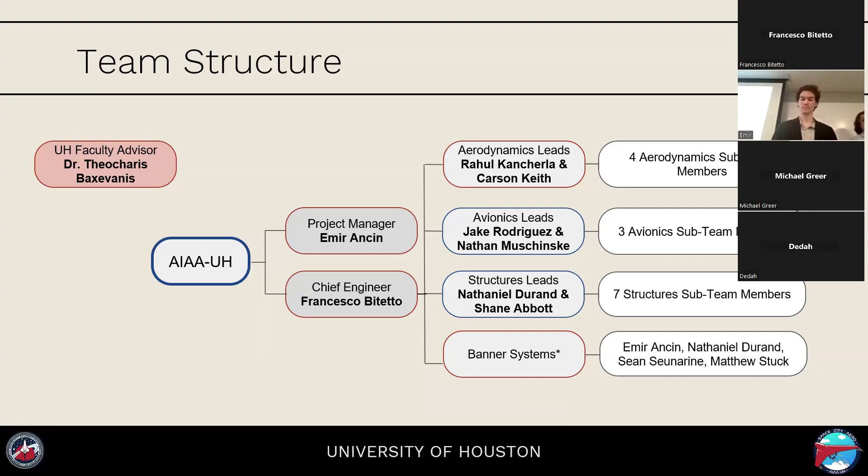All right, now let's talk a bit about the Design Build Fly competition. It's an RC aircraft competition hosted by AIAA. The challenge changes each year, and includes 3 flight missions and 1 ground mission.

At the end of last year, around September, we had to submit a proposal, and the top 100 proposals worldwide get invited to the fly-off. This year's fly-off will be in Wichita, Kansas, on April 16th to 19th.

This year's competition has a theme of a banner towing bush plane, where we have to design, build, and fly a banner towing bush plane that can also do shorter missions and deploy a banner.

We have some major constraints, like a max wingspan of 5 feet with a minimum wingspan of 3 feet. We can only have a battery with a capacity of 100 watt-hours maximum. Due to FAA regulations, we cannot have a plane with a max takeoff weight over 55 pounds. And each mission has a flight window of 5 minutes.

The first mission is simple: we just have to complete 3 laps flying the flight path with no cargo, no banner, just regular standard flight configuration, and we have to do it under 5 minutes. After a successful landing, we get a score of 1.

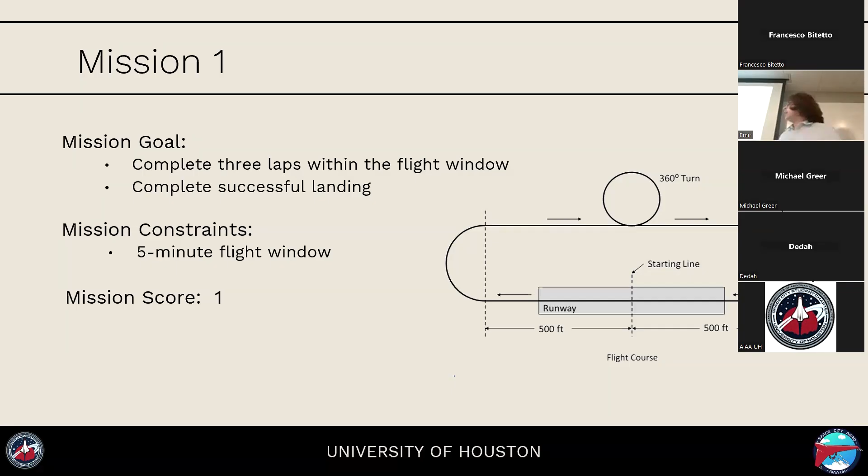Our second mission starts the shorter section of the competition, where we have to complete as many laps as possible under the 5-minute constraint, carrying as many ducks and pucks as we can. There are some constraints though: we must have a minimum of 3 passengers, minimum of 1 cargo, and our minimum cargo to passenger ratio is 1-to-3.

We also must load all the cargo and passengers in a staging box under 5 minutes before flight happens. Our mission score is based on 1 plus net income over the maximum net income someone has earned in the overall competition. The net income is based on the number of ducks and laps, minus the cost, which is also based on the number of ducks, pucks, and laps, but also multiplied by the total propulsion battery capacity.

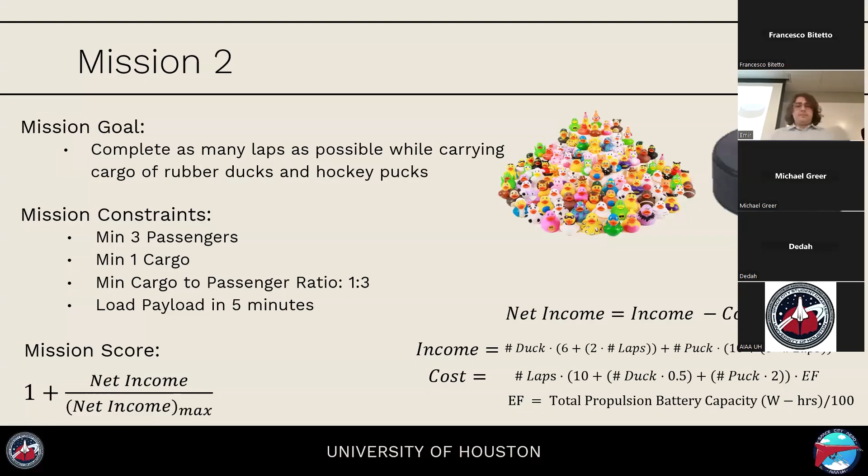Our third mission is the banner deployment, where after initial takeoff, we must deploy the banner after the first turn, do as many laps as possible under the 5-minute flight window, and then before landing, we must deploy the banner again and have a successful landing.

Some of the constraints are we have a minimum banner length of 10 inches with a minimum banner height of 2 inches. The length to height ratio is 5:1. And during flight, the banner must stay stable and vertical.

For the scoring, it's 2 plus the laps we do times the banner length, divided by the RAC score. The RAC score is based on our wingspan, so it's 0.05 times the wingspan plus 0.75. This gives us a constraint of trying to reduce the wingspan as much as possible. Then it's all divided by the maximum score someone got.

Our last mission is the ground mission, where we must complete a set of tasks as fast as possible. The scoring is all based on time. We must load and unload all cargo and passengers, install the banner, deploy the banner, and verify that all control systems are working. This will all happen in a box of 10 by 10 feet.

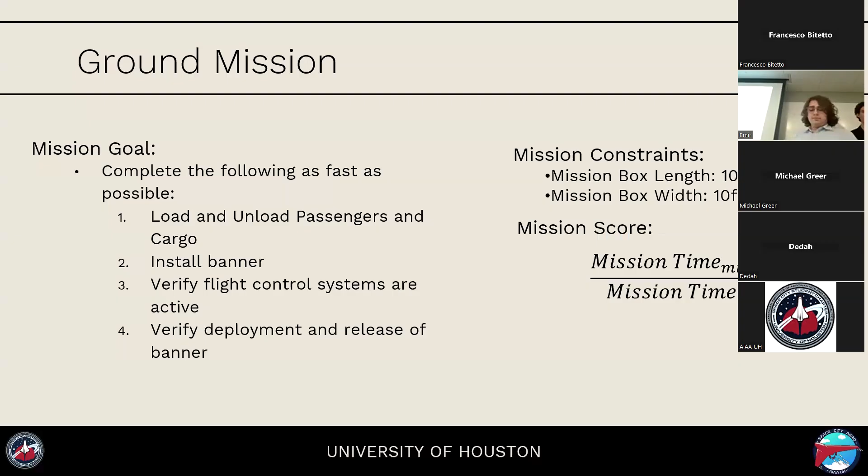When it came to our design methodology, we had a linear engineering-based path where we started with the conceptual design, looking at all constraints. We analyzed all the mission requirements, then moved over to a preliminary design, figuring out the sizing we needed. We did some performance analysis and certain trade studies on all different components.

We then moved over to having a detailed design, finalized a lot of details, then started manufacturing, and afterwards moved over to testing. We evaluate all the testing and how the design performed, and depending on how the test comes out, we would either go back to the drawing board and fix the issues that come up, or finalize those designs for the final competition aircraft.

Here's our design approach for each specific mission. For the first mission, we had a constraint of needing proper maneuverability to fly the course. The aircraft had to fly at a certain velocity to ensure we complete 3 laps under the 5-minute window, and we also needed to make sure the plane was easy to manufacture.

For our second mission, we wanted to maximize the amount of cargo space for the ducks and the pucks. We needed to maximize the amount of laps we could complete, and make sure our wing was capable of producing enough lift to take off with all of that cargo. We also had to make sure the cargo and passengers could be loaded under the 5-minute window.

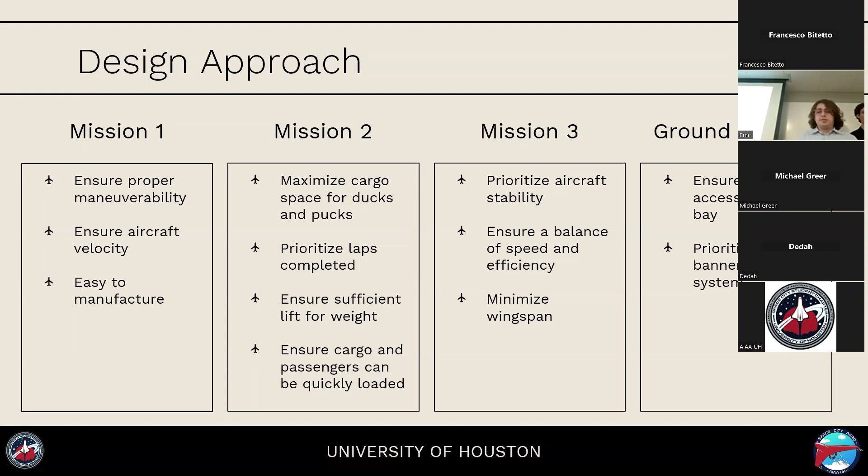Now, before we could even fly, we do have to pass tech inspection. Tech inspection involves verifying the safety of the design, ensuring that everything is good and flight ready. We must have a signed pre-tech and first flight certification form, and we must show a video of straight and level flight.

None of our batteries can exceed 100 watt-hours. If we have multiple banners for mission 3, they must all be brought to tech inspection and signed off. We must also verify that we have a fail-safe mode, which is having the throttle closed, full up elevator, full right rudder, full right aileron, and full flaps down.

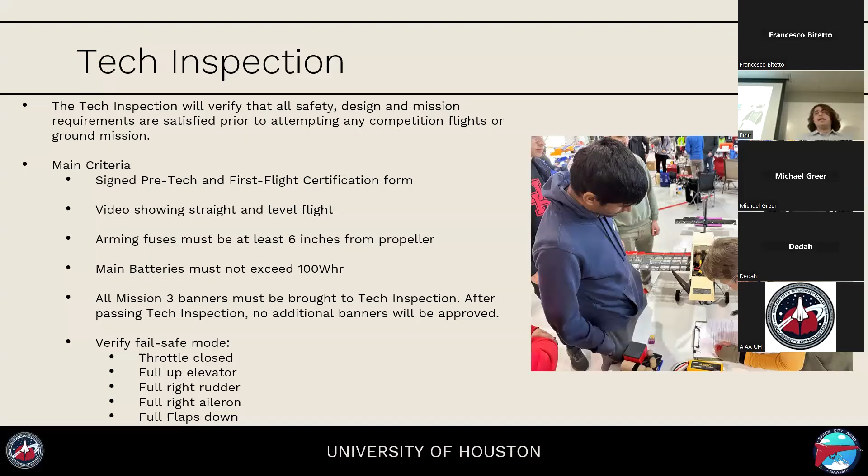I would like to now talk about the team goals we set for ourselves at the beginning of this year. We had 3 major goals. Those were attending the competition fly-off.

This comes from our proposal scoring being in the top 100 proposals overall. Second, manufacturing a flying prototype by CDR. Third, actually attending competition and attempting all 3 flight missions and 1 ground mission.

Looking at those goals right now, we have successfully achieved the first goal, which is attending the competition fly-off. Our proposal scored 17th out of 175 teams globally, and also scored the best in Texas, which is the best score in team history.

Looking at the second goal, design and manufacture a flying prototype by CDR, as you can see, our prototype plane is here. In terms of a flying prototype, it is currently missing minor things, MonoKote being one of them, and the battery and ESC, like avionics installation on the aircraft. But besides that, the plane is there.

And we are hoping to achieve our last goal in April at the competition.

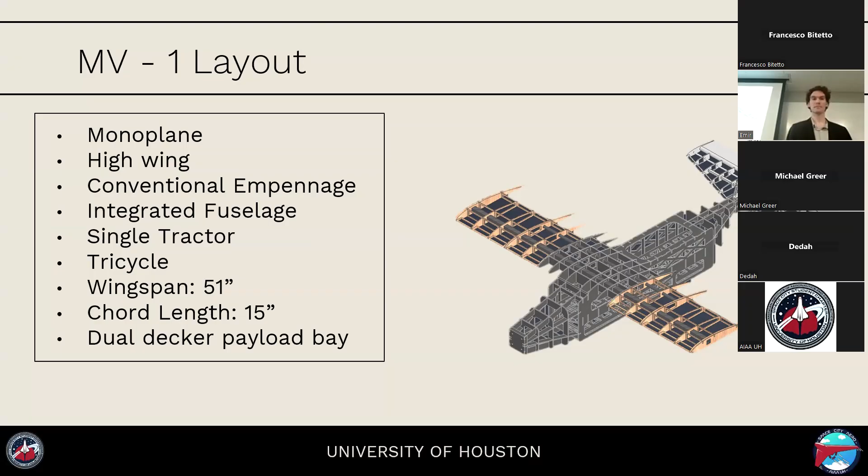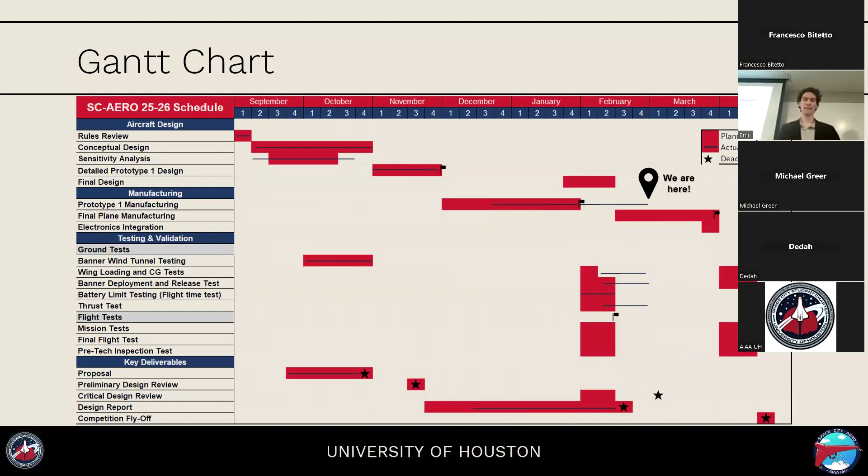However, I would like to mention here that we are indeed about 3 weeks behind the Gantt chart that we proposed because of a few issues. The main one being no access to manufacturing lab space. We were expecting to start building the plane over winter break, given our lab space at TechBridge, but unfortunately that did not happen. Our backup plan was UH Makerspace in the Bates Law building, and we had to wait about 2 weeks for that to open when the semester started. So we have that kind of setback in our Gantt chart.

Looking at our remaining weeks and going forward schedule: week 1, starting next week, we are hoping to implement feedback from CDR and start designing the MV-0 prototype aircraft. MV-1 will be the final competition aircraft. In week 2, we hope to start test flights of the MV-0 prototype and begin early manufacturing of the final aircraft, MV-1, starting with laser cutting.

In weeks 3 and 4, we are hoping to manufacture the final competition aircraft, which includes assembly of the parts, gluing the parts, electronics assembly, and 3D printing the necessary components. The 4th week will also include the final MonoKote wrapping of the aircraft, and the 5th week will be the final flight tests. The subsequent week, we are hoping to attend the competition April 16th through 19th in Wichita, Kansas.

Looking at the team budget, this year the project is sponsored by the Fluor Fund, which funding will be used for the electronics, structural, and manufacturing cost of this aircraft, as well as manufacturing tools for future years. Avionics and structures are covered by Fluor funding.

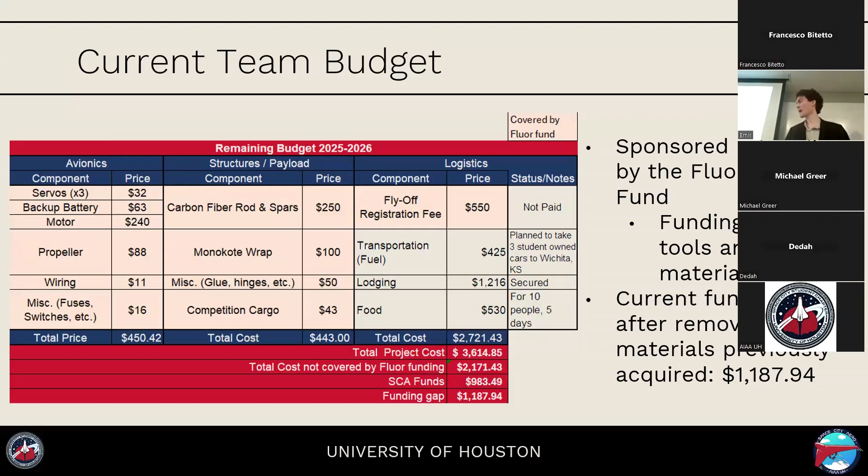With that being said, I will give it to Aerodynamics for their updates.

So what do we do in Aerodynamics? We design, manufacture, and analyze the wings, empennage, and their associated control surfaces, as well as any other aerodynamic related components of the aircraft. There are really 2 components to what we do: the analytical components and the structural components. The analytical being airfoil, wing and tail configuration, lift analysis, and stability analysis. Then we move on to the more structural components, which is the actual design of the wings, empennage, and control surfaces. Software we use includes XFLR5, COMSOL, MATLAB, and CAD software.

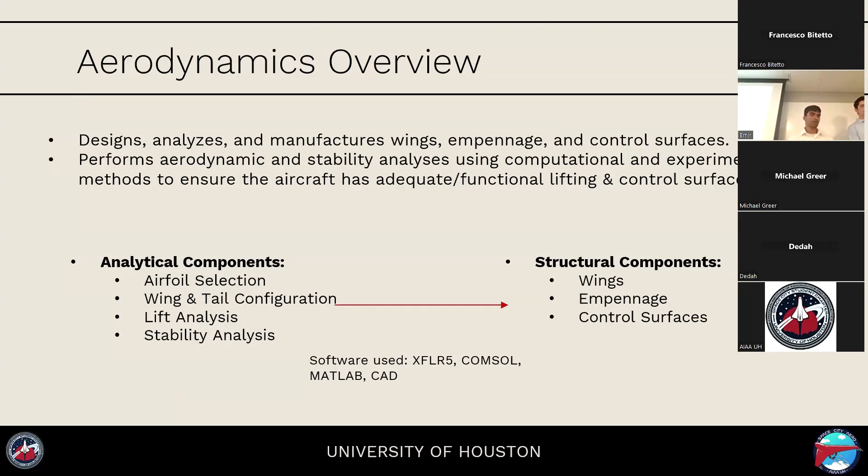So from basically going from PDR to our first prototype, that's basically conceptual design to physical prototype. What got updated was the empennage sizing itself. We took into account volume coefficients this time. In the past, we would just use rules of thumb that we had in the back of our heads. Now we take into consideration the wingspan, the surface area of the wing, as well as moment arms.

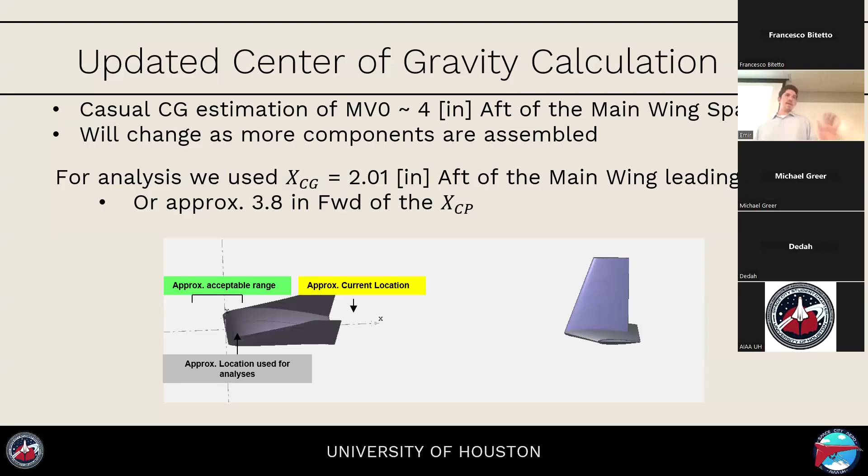When I came in here in the spring, I wasn't obviously here for the main theory stuff in the fall, but for the spring, I wanted to join the team. We wanted to research a little bit, specifically the winglet and also the idea of adding fairing to the landing gear. Obviously, neither are critical for the safety of flight, but definitely looked into for purposes of efficiency.

So I did the winglet trade study here. As you can see, there's 4 different ones we compared: the traditional, blended, the end plate, and the Hoerner tip. We also compared it with no winglet just to make sure, just to compare the differences that we were getting. So the traditional winglet actually ended up winning.

Before, we had kind of a holistic decision matrix, which included things like integrity and manufacturability as criteria, but really we didn't have a value for those. So we took those out because manufacturing is pretty similar for all of them and not as much of a concern. So we ended up just using the coefficient of lift, coefficient of drag ratios, the lift force and the drag force, which of course traditional won in 2 out of the 3 of those. So that's what we're going to do for winglets for MV-1. For MV-0, we don't plan on testing the winglets.

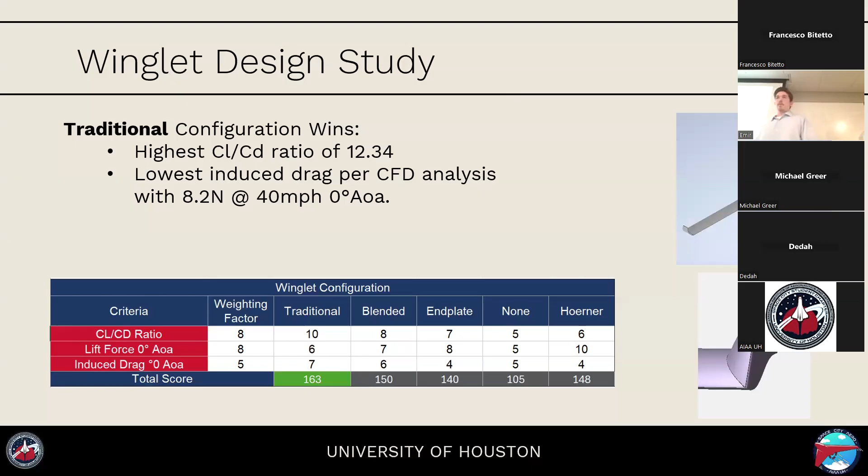Landing gear fairing design. This was actually done by one of our members. I just did the CFD on it and got the drag force.

As you can see, the wheel alone has about 0.593 newtons, and with the fairing it reduces to 0.578. So a little bit of a reduction, and that's on our 4.3 inch diameter wheel. There's going to be 3 on the airplane, so just a little bit of a gain, and again, another research item that we did.

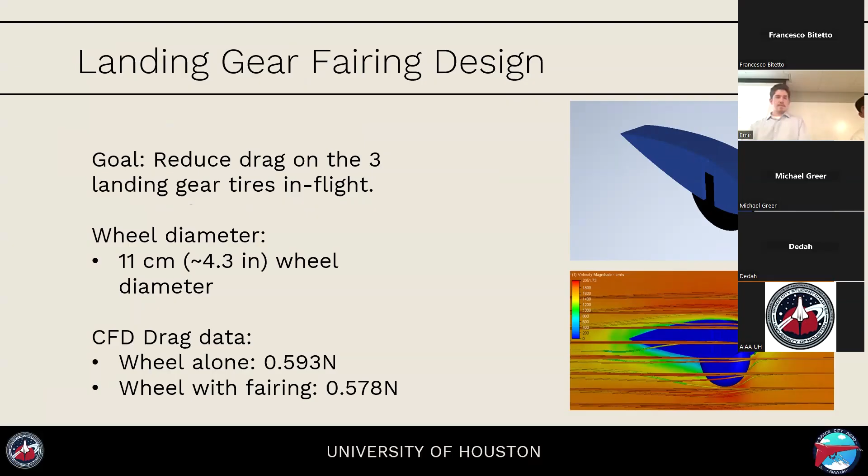So the final design parameters of the wings and the empennage for MV-0 include the following. The wing will have an airfoil of SD7032. It's a high wing configuration. The span is 51 inches and chord being 15. The taper ratio is constant forward with no sweep.

The horizontal and vertical will both have an airfoil of NACA 0012, the span being 27 for horizontal and 11 for vertical, with a taper ratio of 0.57 and 0.55 respectively, also with no sweep.

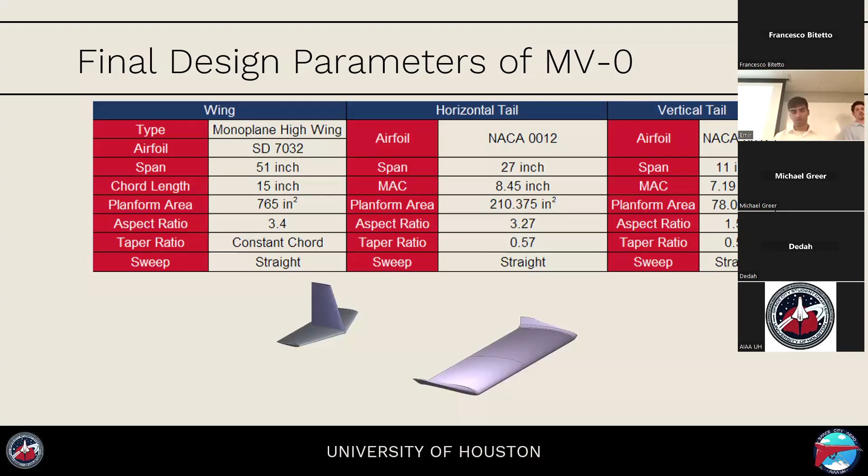Next, moving on to the aerodynamics MV-0 testing, which is basically the center of gravity test. The objective is to verify the actual CG compared to the analysis data. The methodology would be a balance point test using a carbon fiber spar, and the expected outcome is that the ideal CG is forward of the wings.

Concluding for aerodynamics, we're going to talk about the lessons learned and the things we plan to change for MV-1. Starting off, we actually made the control surface, the empennage, the horizontal stabilizer in the tail, much bigger compared to before, because that was actually one of the main factors of the mishap crash at DBF 2024. That was one of the main causes, so we are confident in our sizing for this year.

As far as for MV-0, we're using again that SD7032 airfoil. One of its weaknesses is that it has some sacrificed lift generation compared to, for example, NACA 5412, which is what we used last year and the year before. The reason we used it was for efficiency optimization, so we are sacrificing some lift.

Because of that, we are going to have to fly at a higher cruise speed than, for example, with the 5412, since we have less lift, and that could be a problem. Again, we talk about landing and takeoff speeds with the landing gear. That's where the high takeoff and landing speeds could be a problem.

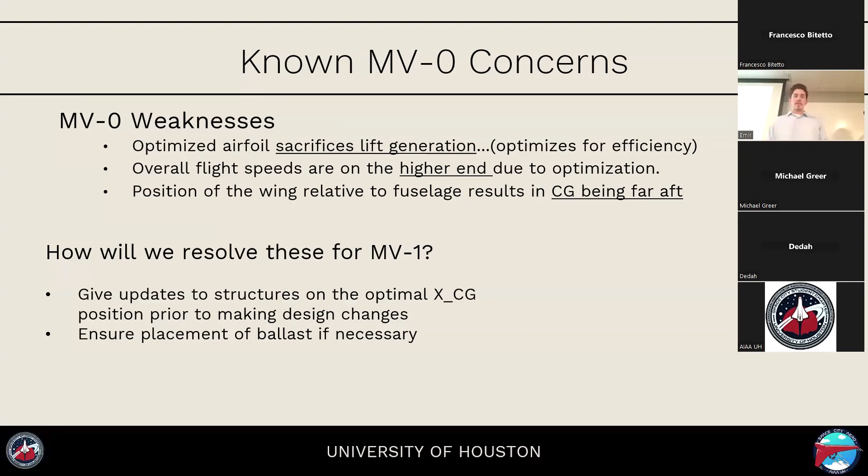And yep, that is it for aerodynamics.

Good evening, everyone. I am Shane, one of the structures sub-team co-leads. I am Nathaniel, the other sub-team co-lead for structures.

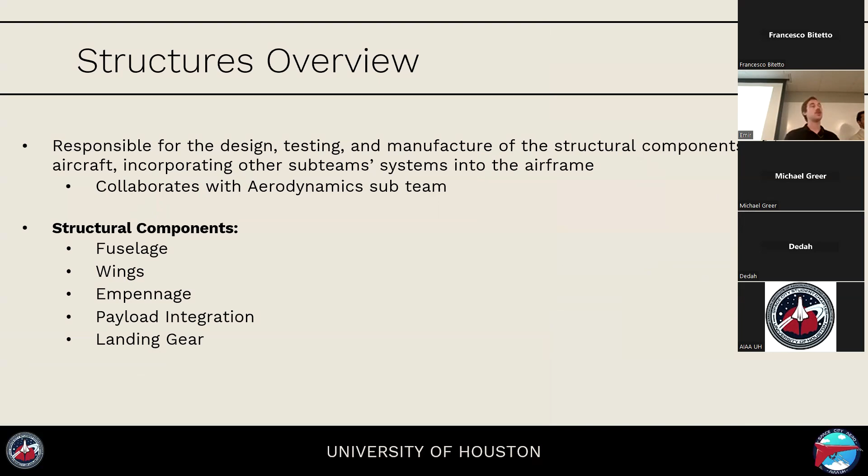As a structures overview, we are responsible for the design, testing, and building of this year's two aircraft. For both aircraft, we will be designing, testing, and manufacturing the fuselage, wings, empennage, and landing gear. Additionally, due to this year's mission requirements, we will also have payload integration added to our task list.

So from PDR to MV-0, from our conceptual design that some of you may have seen at PDR to our physical prototype of MV-0, as far as our fuselage structure, there are some things that will change and some that are unchanged. For unchanged items, we are still using an integrated fuselage design with no carbon fiber tail boom. The laser cut components are still laser cut with the jigsaw design using frame ribs and bulkheads, again with side plates, all covered in a Monokote style skin as expected for our team's needs.

For MV-0, we are changing some things. We're using less bulkheads, moving the wings about 2 inches back. We are hopefully reducing weight by skeletonizing the cross patterns, and changing the tail structure to a flat structure for easier integration of the empennage and horizontal stabilizers.

So the fuselage is a 2-deck fuselage. The top deck has the cargo in the front, which is the pucks, and the passengers in the back on the top side. On the bottom, the front has the avionics, and in the back will be the banner deployment system, with the banner release system at the back of the plane.

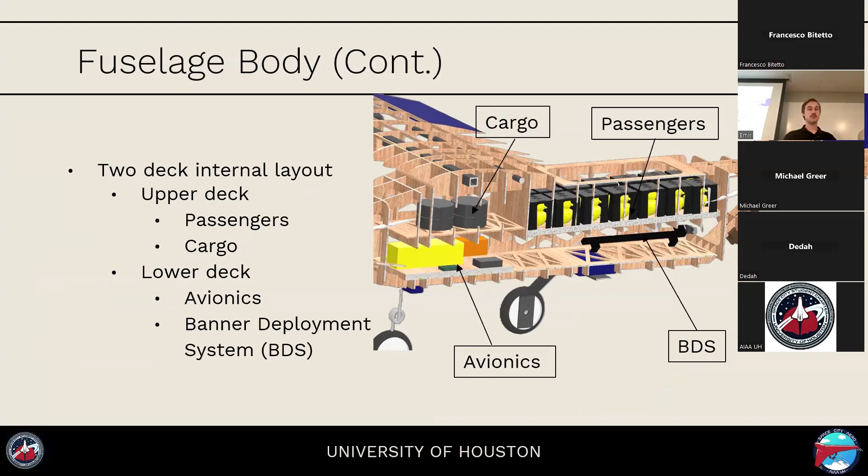For our wing structure, we're going to use a similar construction to our fuselage body, that being laser cut wooden components with longerons and ribs. However, with our wings, we are going to be using 2 carbon fiber components: a 20mm square tube spar and a 1/4-inch carbon fiber rod reinforcement piece. This is again all covered in a Monokote style skin, using the SD7032 airfoil profile as aerodynamics mentioned previously.

The horizontal stabilizer structure is very similar, however there are a few distinct changes. It's the same construction as the wings with laser cut basswood and a Monokote style wrap, with longerons and ribs. Our root rib, at our ends and closest to the fuselage, is 3/8 inch thick, and was 3D printed with GCF carbon fiber filament. There are 2 carbon fiber spars: a 10mm square main spar and a 6mm carbon fiber rod, which also doubles as our control surface hinge axis. This uses the NACA 0012 airfoil profile, as aerodynamics mentioned earlier.

Our vertical stabilizer is also much the same. It's a laser cut construction with a Monokote style wrap, using 10mm square main spars and a 6mm carbon fiber rod, also acting as the axis of rotation, still using the NACA 0012 airfoil.

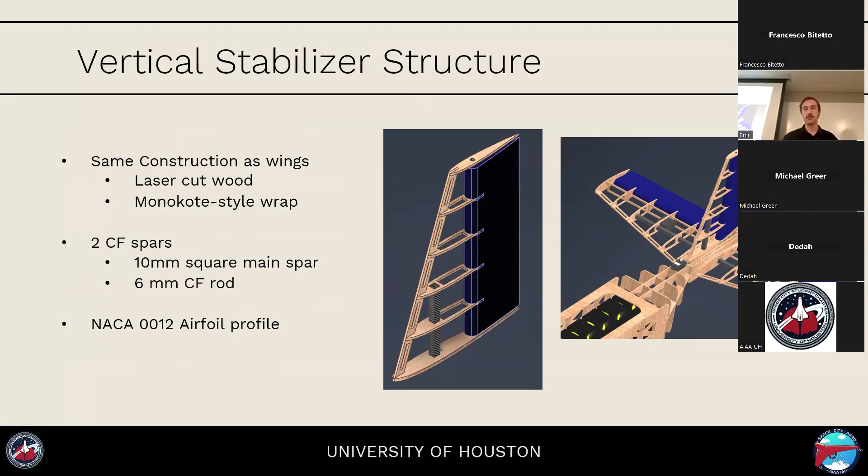Our control surface system includes our physical control surfaces and our servo brackets. Avionics will go into further detail about the actual electronics, but for structures, it's important to know that our ailerons use Monokote taped to the ribs as their hinge, and are constructed using PETG carbon fiber filament.

Our elevators are also using PETG carbon fiber filament, again using the 6mm carbon fiber rod. Our rudder is just standard PETG with no carbon fiber added, also using the 6mm carbon fiber rod as our axis of rotation. Our servo brackets, shown here in the bottom right, are constructed out of PETG CF and fix the servo with 3mm bolts and nylon locks.

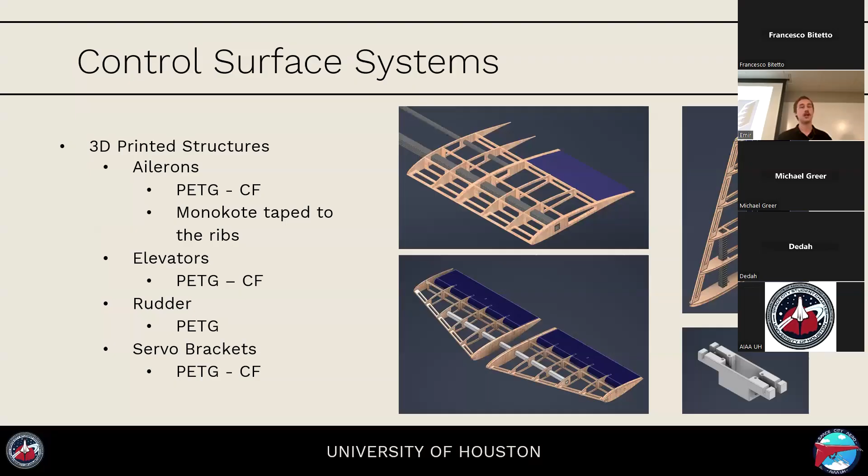There are two main types of payload: ducks and pucks. The graph shown is our sensitivity analysis for that mission, where darker red means more points. With calculations, we found that 14 ducks and 4 pucks gives us the best score.

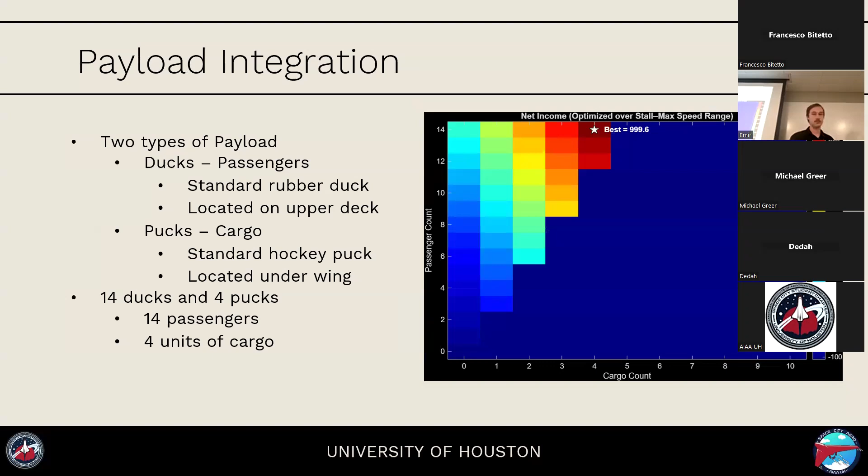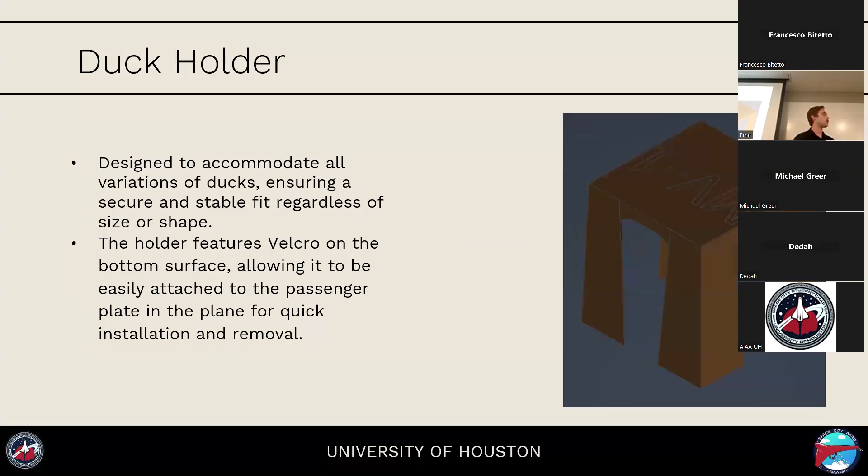This is the duck holder design. It accommodates all different types of ducks since there's a variety of them. It has Velcro on the bottom of the holders, which attaches down to the base plate on the top side of the fuselage.

Then there's also the puck holder. It has Velcro on the top side, and there's also Velcro on the bottom side of this plate. The pucks are a tight fit and fit right into the holder—you slide them right in and Velcro them down. The top one will also fit right inside, and it'll Velcro right on top of the other. Once there's Velcro, it won't move.

For the landing gear, we're using a tricycle configuration with a single nose gear and 2 rear gear. Both of them, this is a big change, are going to be COTS, commercial off the shelf. We needed a large ground clearance due to this year's team and mission requirements, so 12 inches of clearance for the propeller and banner systems.

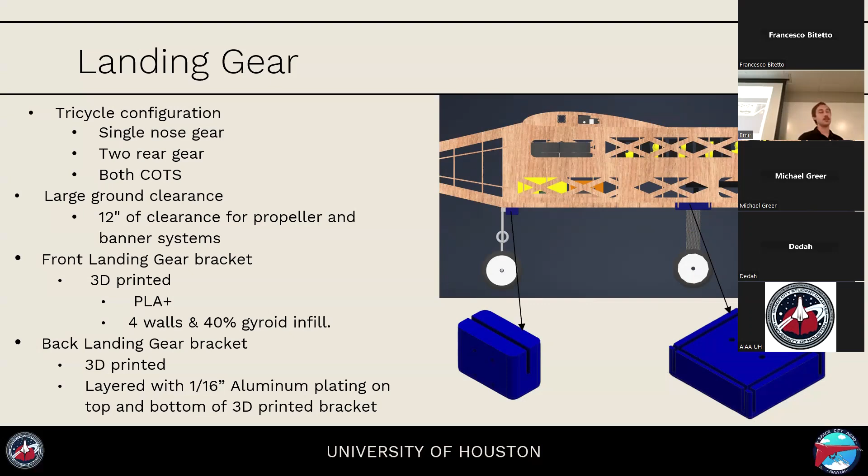Our front landing gear bracket is 3D printed with PLA Plus using 4 walls and 40% gyroid infill. Our back landing gear bracket is also 3D printed, and additionally layered with 1/16 inch aluminum plating on top and bottom of the 3D printed bracket. Now you may ask—if some of you were here last year or last PDR, you'd remember we said we were going to manufacture the front landing gear in-house.

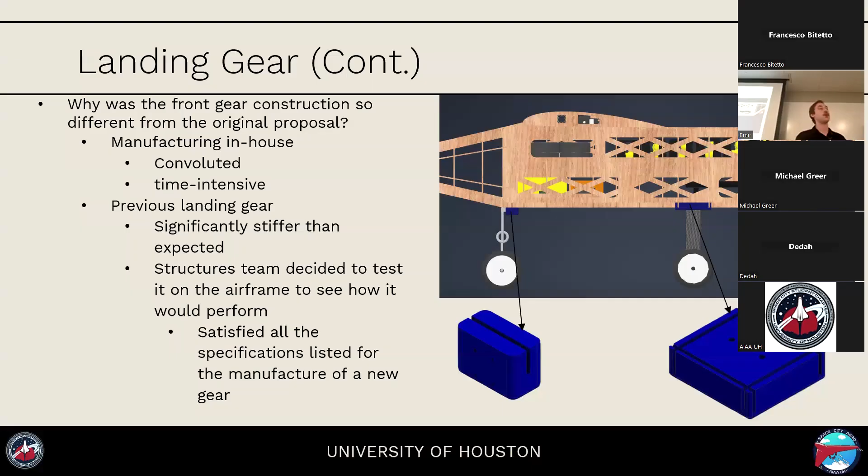So we learned something, but we discovered that even with our channels available to us as University of Houston students, manufacturing in-house is still convoluted and time intensive for the rapid prototyping and rapid changes required for the team. The structures team noted their previous landing gear was significantly stiffer than expected, so we decided to test it on the airframe to see how it would perform. It satisfied all the specifications we would have listed for manufacturing a new gear, and significantly reduced costs for not that much sacrifice in performance.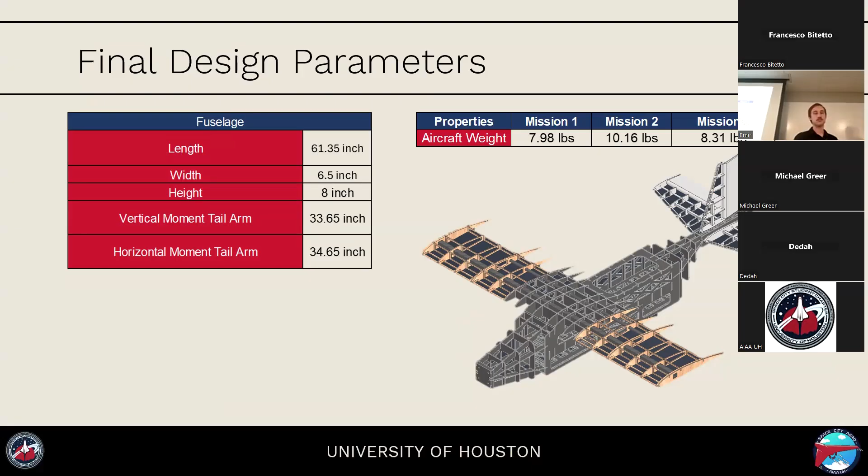Here is the 3-point configuration drawing that we've made. The drawing on the right shows the different configurations for each mission.

We move on to MV-0 testing. For the wing structure loading test, we're going to determine if the wings can stand the weight of the whole plane by grabbing both ends of the wings and holding it up, propping it up. This should show that our wings can withstand the whole weight of the plane.

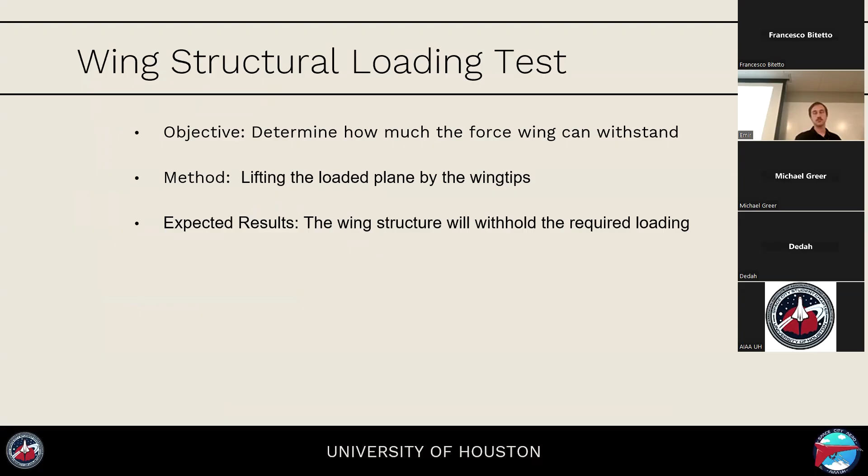For the wing spar, we're also doing a wing spar loading test. We're going to do 2 cases: one where we fix the ends and apply weight in the middle of the spar, and another where we fix the middle and apply weights to the ends of the spar.

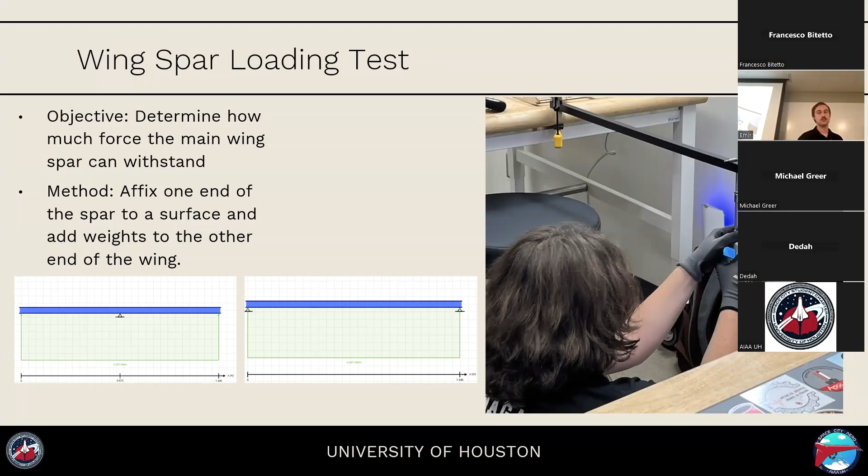For a landing gear impact test, our objective is to determine if our landing gear can survive our classic Carson rough landings. Our method is to drop the plane at certain heights with an applied forward force, starting at 1 foot, then 2 feet, then 3 feet, and with success at 3 foot drops, moving on to 5 feet, dropped just forward. We'll measure the deflection and also test for structural integrity afterwards.

Our nose structure test is going to determine if the nose structure is strong enough for the maximum thrust produced by the motor. Our method is to pull the nose structure at the motor mount with our maximum expected thrust force, utilizing a force gauge in tension configuration. We're also going to apply torsional loads on the front fuselage to simulate the propeller effect in a nonlinear curving fashion.

So our lessons learned are design considerations for MV-1. MV0 is heavier than the team expected. The total weight, including ducks and pucks, is projected to be around 4.45 kilograms, or about 10 pounds. This is based on actual and projected weights, and until flight tests are completed, it's difficult to tell if this is satisfactory for our mission requirements. Mission 1 is 8 pounds, mission 2 is 10 pounds, mission 3 is 8.3 pounds, so there's a somewhat significant variety of weights.

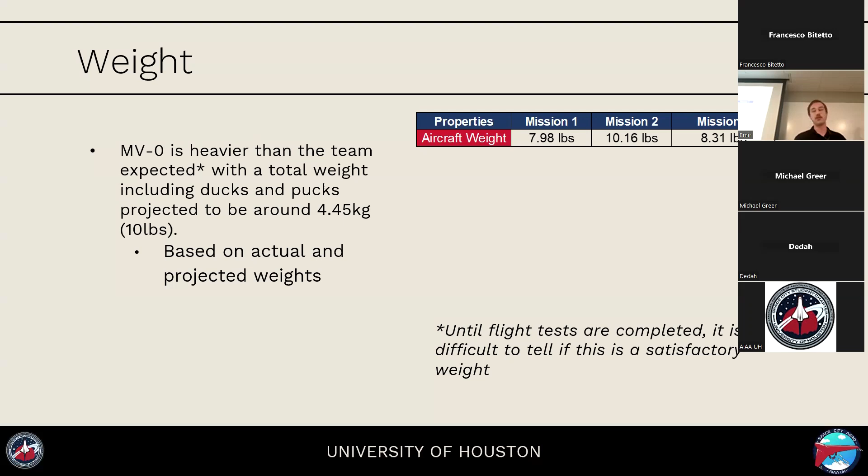Our CG location is far back, so our plane is a little tail heavy. We are planning to put weight in the front of the plane to offset it and bring it to an acceptable range.

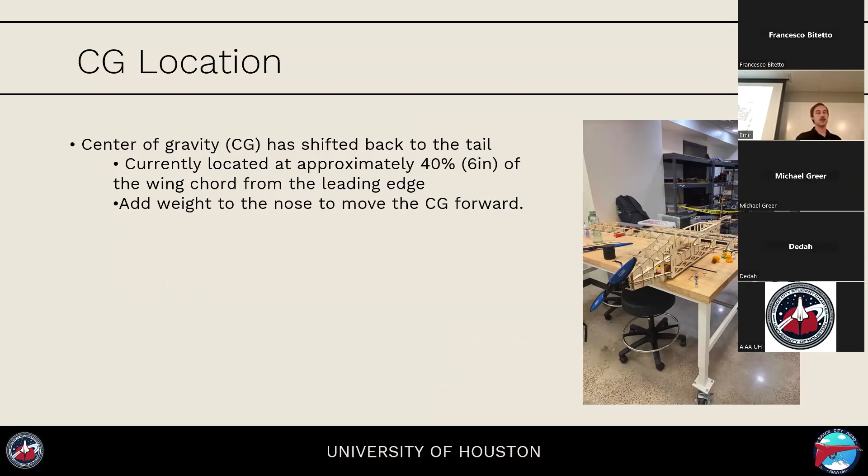And that is all we have for structures. Thank you.

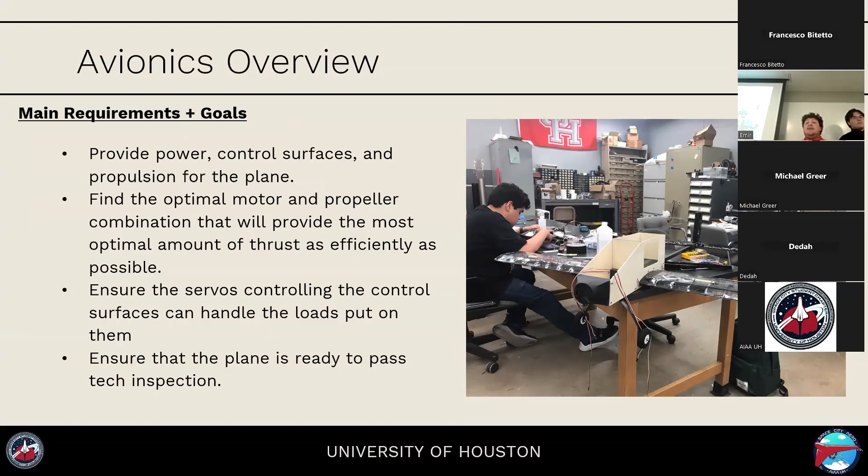So going on from what we did from PDR to the MV0 prototype, these are our final design parameters for MV0.

For our motor, we have a Sunnysky X5320 210 kV motor. For servos, we have 8 servos: 7 Daryl servos and 1 MG995 servo. For our receiver, we're using a Spektrum AR8360T. For our ESC, we're using a Spektrum Avian 100 amp ESC. For our transmitter, we're using an NX8 20 channel DSMX transmitter. For our propulsion battery, we are using a Liperior 6S 4500 milliamp LiPo battery. For our fuse, we're using a competition required 100 amp fuse. And for our propeller, we're using a Falcon 20x8 carbon fiber propeller.

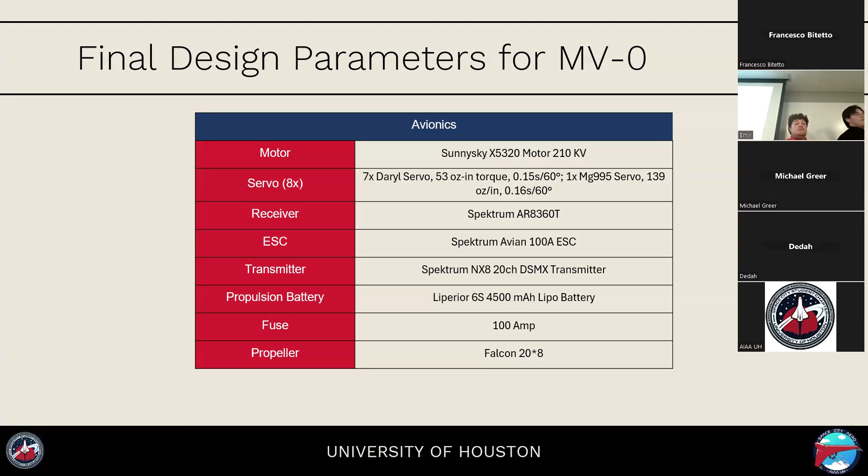This is also the final circuit diagram for MV0. We have our LiPo battery in the top left, powering our ESC, which allocates how much power goes to the motor. These are connected with a 100 amp fuse as per competition rules.

In the middle, you see the receiver, which is powered by a switch, universal battery eliminator circuit, and 2S small battery system. The receiver gets signal from the transmitter, which sends it to the ESC, which helps the ESC allocate power to the motor. Our receiver also powers 8 servos.

7 Daryl servos, 5 of those being for the control surfaces, 2 of those being for the banner system, and we have the MG995 servo controlling the landing gear because it has a higher torque.

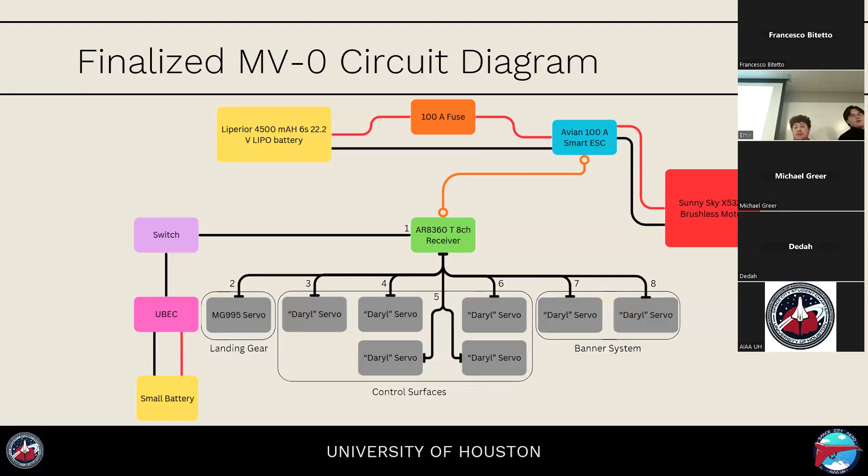So we're going to start talking about the testing that we're going to be using for the prototype. We found 5 different testing parameters that we wanted to focus on, which were full circuit testing, thrust testing, battery drain testing, transceiver range testing, and servo load testing.

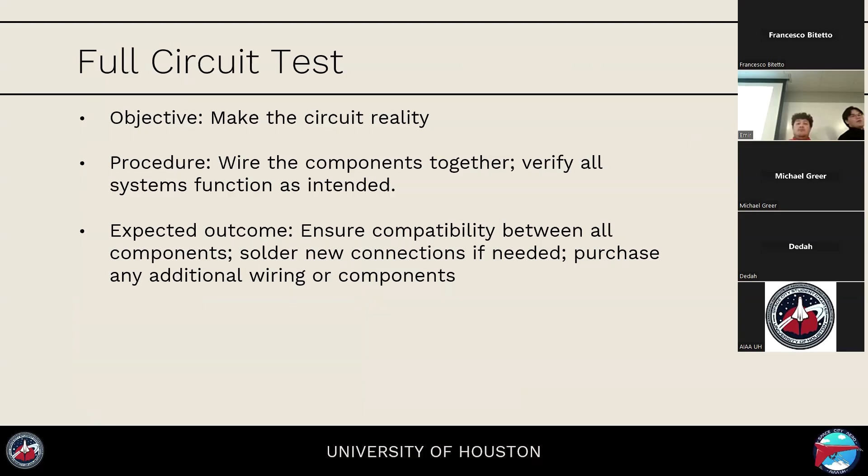For our first test, which is already completed, we did a full circuit test. We made the circuit from the diagram into reality. How we did this was we wired all the components together and verified all the functions worked correctly. If needed, we ensured compatibility between all components. We soldered new connections we needed, and we also bought additional wiring if needed.

The battery drain testing is to find the maximum flight time of the plane. The way we're going to do this is we're going to run the motor at cruising speed for about 2-minute intervals and check the battery voltage after each run. We're going to do this for about 10 minutes. The expected outcome is to verify what our expected flight time of the plane will be.

For our thrust test, we are going to find the maximum thrust of the Sunny Sky KV210 motor. We're going to put the motor onto a load cell and determine the thrust of the motor at different throttle percentages. This is to verify that the thrust data for the KV210 will be enough, and if it does not produce enough thrust, we will buy a new motor for MV-1.

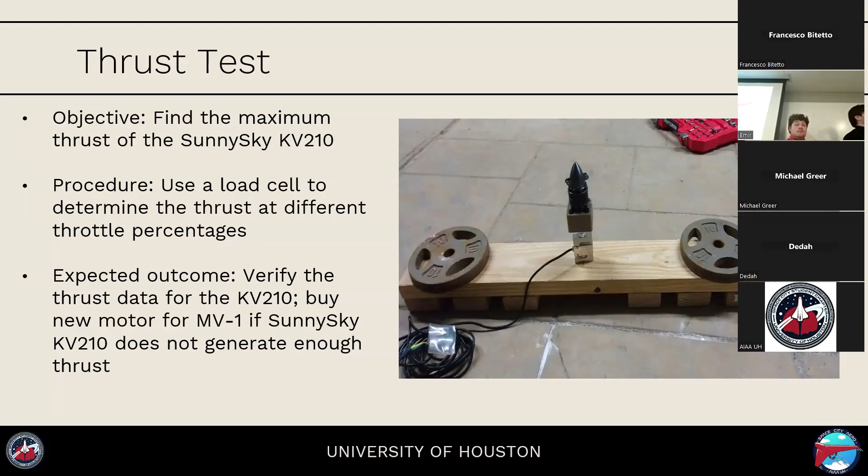The transceiver range test is to find the maximum range between the transmitter and the receiver. The way we're going to do this is the pilot will be holding the transmitter and sending signal to the plane while it's on the ground, basically just servo controls, and stepping back. The expected outcome is to make sure that the transmitter can still transmit data to the plane at different distances, and that it's enough to meet the competition requirements for how far away the plane will be from the pilot during the competition flight.

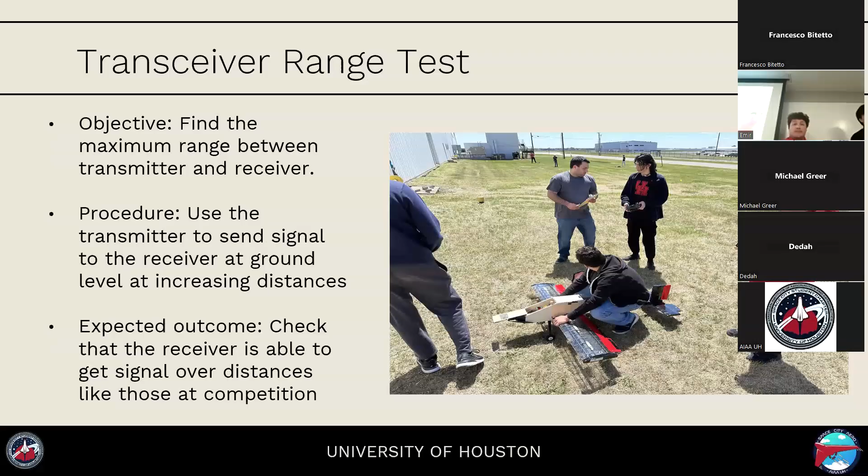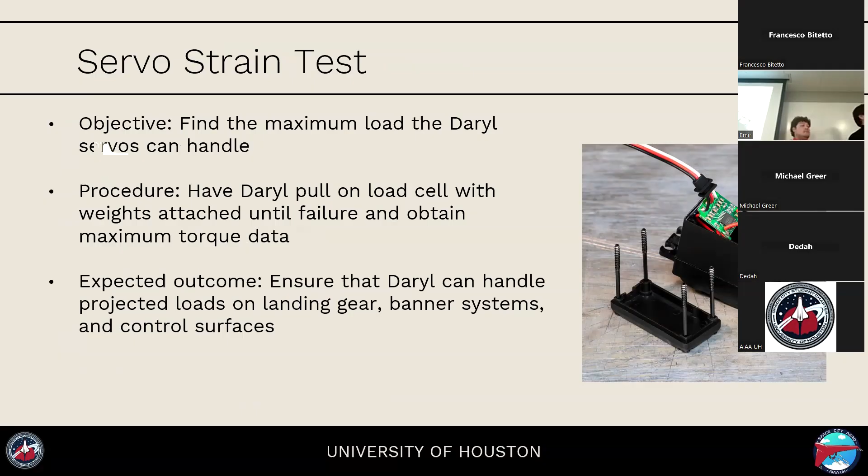We're also going to do a servo strain test. This is to find the maximum load that the Daryl servo can handle. We're going to have Daryl pull on a load cell that has weights attached to it until Daryl fails, and this is to ensure that Daryl can handle the predicted loads on the banner systems and control surfaces.

So these are the lessons learned that we have found out throughout the development of the prototype and leading into MV-0. The first is motor issues. Due to a previously unnoticed change, the thrust efficiency data was using the 3070 kV motor datasheet, but not the actual 210 kV motor. This change resulted in a lower maximum thrust due to a smaller maximum current amperage of the 210 kV motor. The thrust test will determine whether the 210 kV motor will be sufficient or if Aeronautics will need to purchase a new motor.

We also had UBEC and servo issues. The old UBEC and switch system was overheating and causing a burning wire smell, so we were forced to buy a new switch and UBEC.

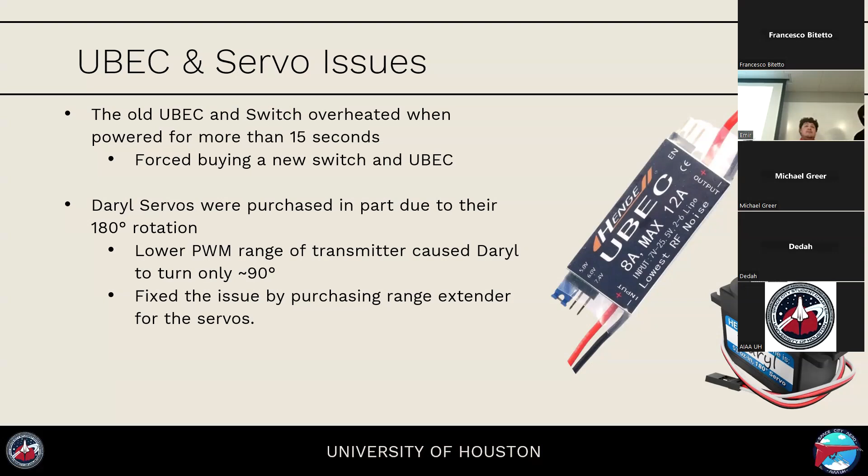For the Daryl servos, we bought them with the thought that they turn 180 degrees. However, due to our transmitter's lower pulse width modulation range, Daryl only turned about 90 degrees. So we had to fix this issue by buying range extenders for the servos.

The final thing was ESC issues. The ESC was modified in an unconventional manner, which caused some confounding errors. The first modification was that the throttle control cable's ground cable was taken out instead of the power. This is a design requirement of the competition where the ESC cannot power the receiver itself.

It has to be done through the UBEC, but we need signal and ground to be able to communicate to the motor itself. So the fix was basically just take out the power cable, plug the ground cable back in. Everything functions perfectly fine after making that modification.

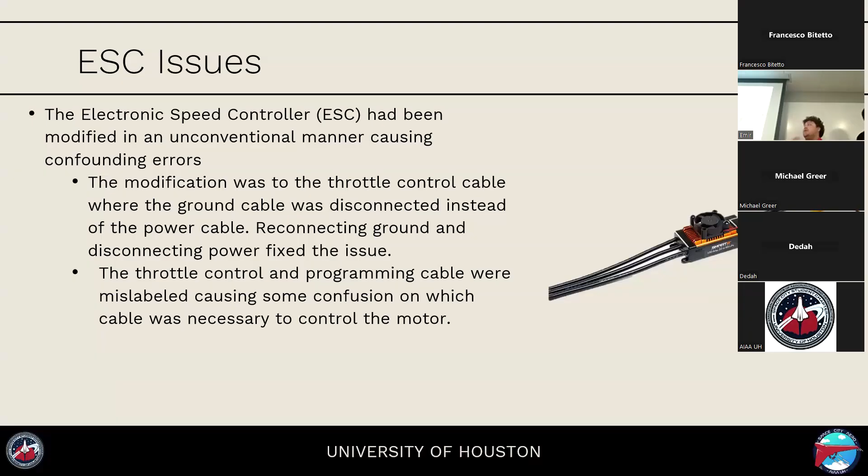And the final thing was that the throttle control and the programming cable was mislabeled, causing confusion on which cable was actually required to send throttle control to the motor.

And now it's banner systems.

Now moving on to the banner systems. This is a capsule team, basically our payload team of this year. Our role is designing and implementing all Mission 3 requirements. Our scope is defined by Mission 3 activities, which comes from the deployment, release, and towing system of the banner. The goals we set for the team are maximizing Mission 3 score through reliable and remote deployment of the banner, limiting the banner drag forces below 10 newtons, and enabling banner lengths greater than 25 inches.

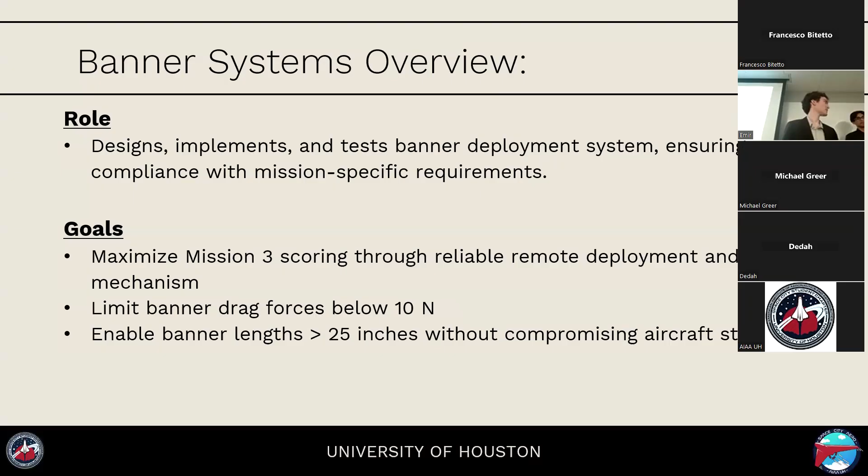To give a quick recap of what happened since the PDR, we first started the project with preliminary wind tunnel tests on different banners of the same material at different sizes, and the same material of different sizes, to get an idea of the drag coefficient of the banners at expected flight velocities. Once we had an idea of the order of magnitude for the drag coefficients, we used an Excel optimization code to optimize the banner dimensions and limit the banner drag force below 10 newtons, which resulted in an 18 by 90 inch banner.

Next, we designed deployment, tow, and release mechanisms. After that, we did more research into banner materials.

The preliminary materials we tested in the wind tunnel were bed sheets, which is just lightweight polyester, batiste, and denim. The bed sheet material performed the best. After we did more research into other materials, we identified ripstop nylon and ripstop polyester as two candidates.

Moving on to the changes from PDR to MVP: based on the data and analysis we collected from semester 1, we created two 90 by 18 ripstop banners, one polyester and one nylon, like Amir was saying.

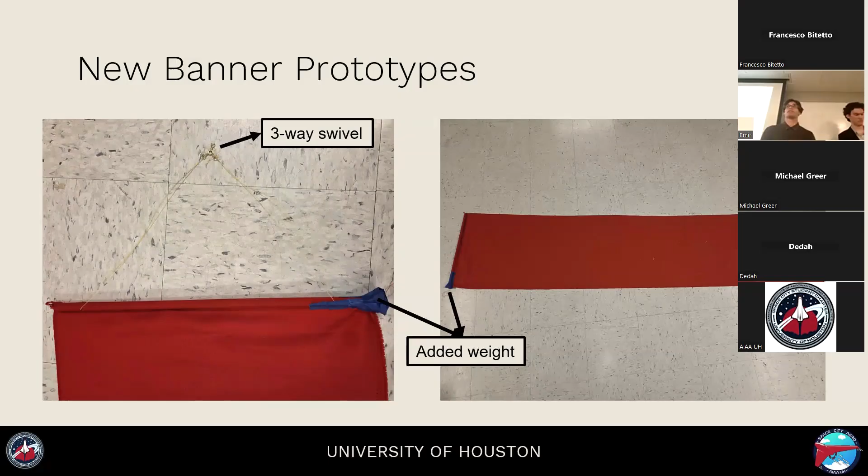Banner drag testing went largely the same as it did for the preliminary prototypes last semester. These new banners were mounted on a test stand and attached to a force gauge, and we ran multiple tests at varying representative airspeeds based on how fast we predict the aircraft will go. After each run, we recorded the maximum drag outputted by the force gauge, and after compiling all the data, it showed a highly linear relationship in the scatter plot.

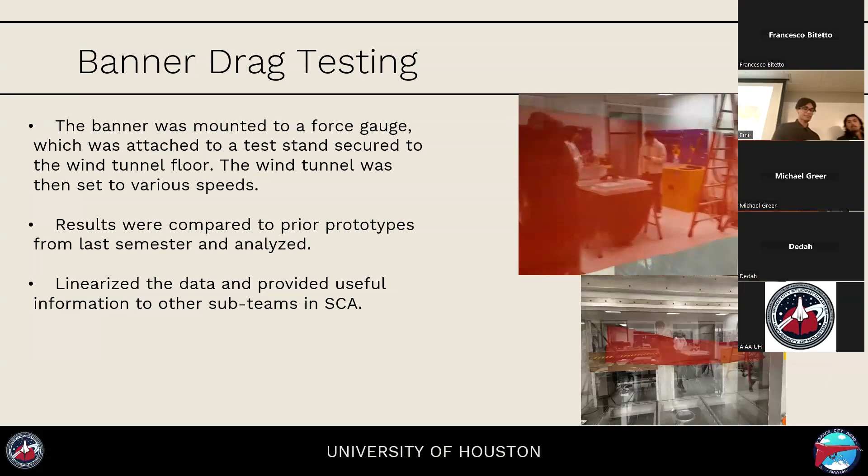This is the data from the actual wind tunnel testing. On the left is the ripstop polyester, and on the right is the ripstop nylon. Some highlighted points are the total drag caused at flight competition speeds, roughly 19 meters per second. We're aiming to cause under 10 newtons of drag at this speed. The ripstop nylon performed just under that at 9.5 newtons, whereas the ripstop polyester was well above it at 14.7 newtons. We also have the R-squared on there to show how linear of a relationship it is—both very close to 1, meaning it is a highly linear relationship.

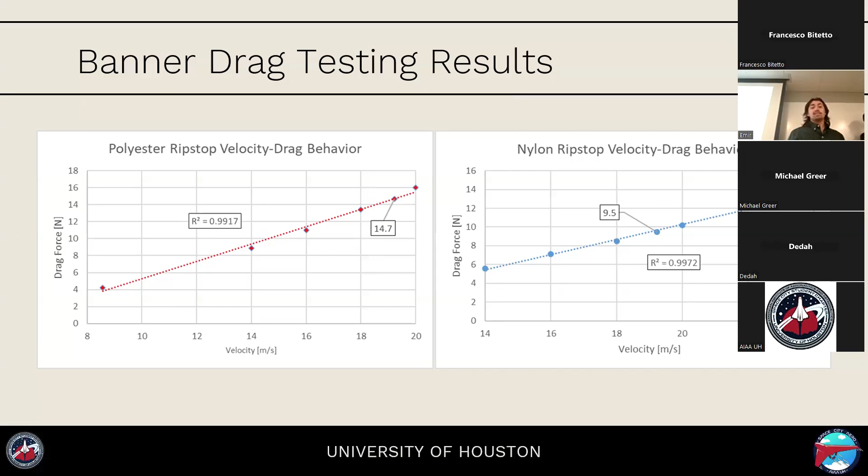This data right here is actually the theoretical data from the analysis we performed last semester compared to the actual experimental data we got this semester with the ripstop nylon. The orange line is that theoretical data from last semester, and the blue is the lab data. So the banner actually performed better than we even anticipated in our analysis.

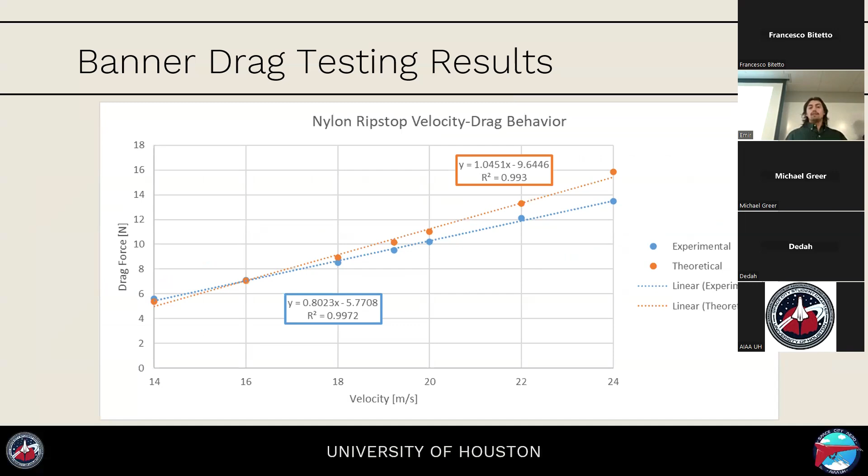So here we have our deployment and release modules. On top, our deployment module is a rotating hooked arm. The way it will work is mid-flight, when the pilot decides to deploy the banner, the fasteners holding the banner will be released by the arm as it rotates 180 degrees. This will allow the banner to unfurl and be towed behind the plane.

The release module, which is a rack and pinion gear system, will be holding the banner in place with a ring on the rack. When this system is activated, the rack will move so that the ring can slip out and cause a clean release of the banner from the plane.

As far as the banner deployment and release systems being integrated with the rest of the plane, we do have them both mounted in the MVP. They're just fitted onto the fuselage and then epoxied together. We printed out some mounts for each of the servos, and then we have the actual moving components as well. On the left side, you see the banner deployment system that is actually on the inside of the fuselage towards the back. The small holes at the bottom of the fuselage is where the straps will be going through, securing the banner under the fuselage.

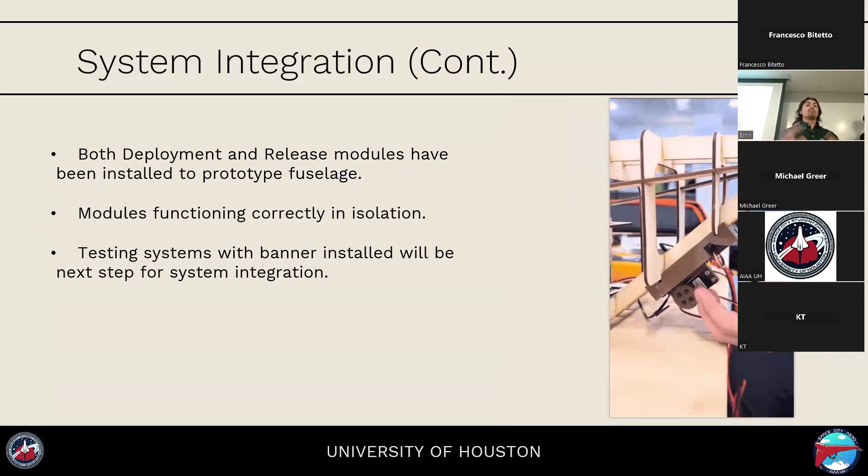This is kind of an example of how that banner release system works. Currently, both of these systems are working in isolation, meaning that we move the servos, they have their full 180 degrees of freedom that we wanted. These straps are falling. We have not been able to test it with the banner itself yet. That'll be our next steps moving forward.

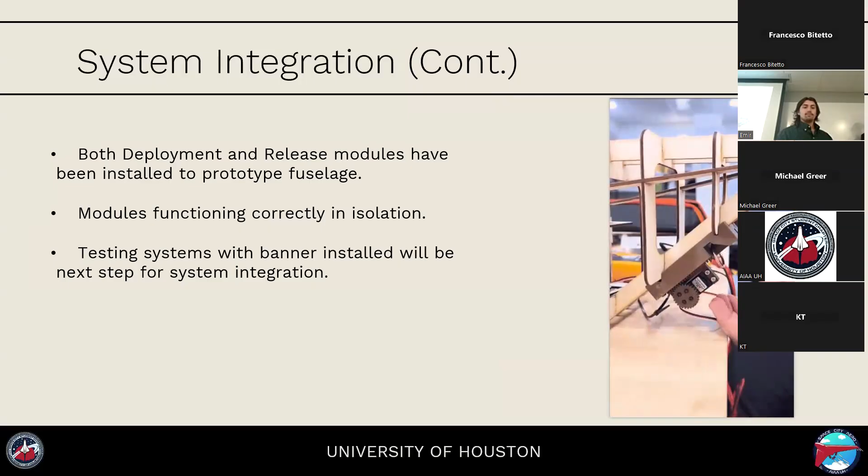Just to sum up, our final banner prototype is a 90 by 18 nylon ripstop banner. The logos are heat transfer vinyl, and the tow lines are made out of a 50-pound test braided line with a 3-way swivel, and this will allow the banner to attach to the back of the plane. The lead pole at the front is a carbon fiber rod, and at the bottom, it is a 50-gram counterbalance weight for verticality.

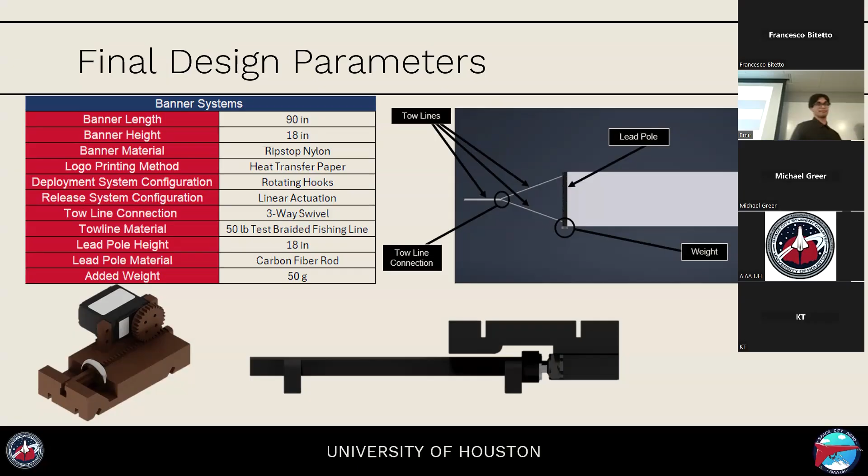So after we complete all the manufacturing of the MV-0 prototype, we are going to move over to the flight testing.

Before going to flight testing, I want to talk a bit about the flight performance estimates that we've done using the MATLAB script that we developed. We are able to estimate values like the bank angle, turn radius, turn time, the competition lap time, and maximum laps that we are able to do.

For mission 1 configuration, meaning mission 1 aircraft weight, we are looking at around 19 to 20 meters per second, which is roughly 40 miles an hour optimized velocity. And for mission 2, we are looking at a slightly faster velocity, around 21 to 22 meters per second, which is closer to 50 miles an hour.

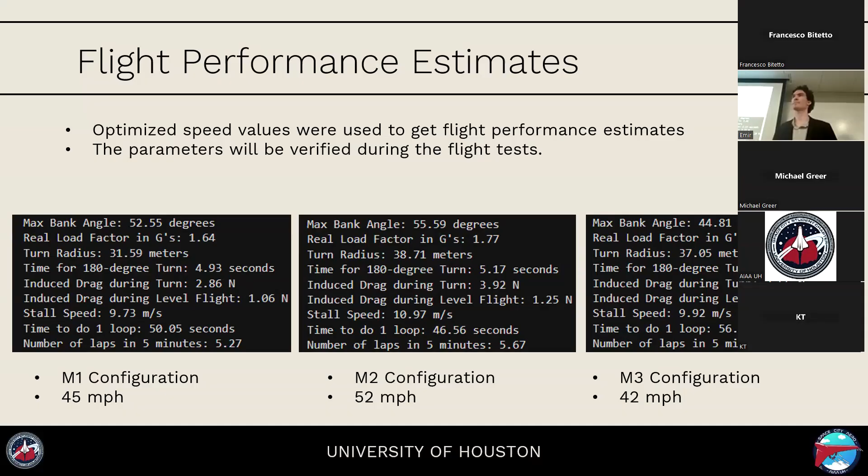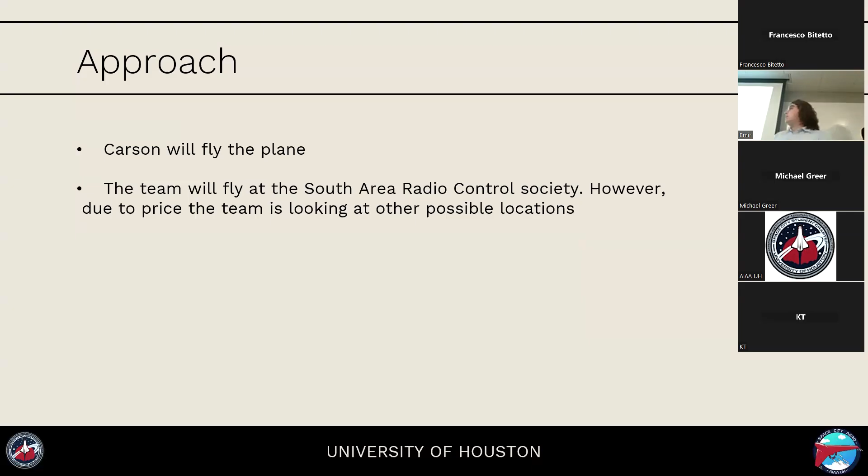To take into account of banner physics, for our different flight tests, our approach will be to have Carson, our pilot, fly the plane throughout all different tests. Our current site, our planned site, is the South Area Radio Control Society. However, due to some unexpected costs, the team is looking at other possible sites at the moment.

The first test we're going to complete is the ground test. We're going to make sure that we can complete all the ground test requirements. We're going to be timing ourselves, repeating this test multiple times throughout the entire process, ensuring that we optimize our time and make sure all loading systems work optimally, so we can hope to be one of the faster teams in the competition.

For our first flight test, it's going to be a simple takeoff and landing test. We are going to be using the Mission 1 configuration. We will have the pilot take off and land, fly around at low altitudes in case of needing to do an emergency landing. A few tests we're going to be doing is measuring our takeoff distance and takeoff speed, ensuring they align with the calculated values.

To get the takeoff speed, after we find out the distance, we're going to time how long it takes to get there, getting the acceleration from the thrust we get from the motor, and basically use kinematic equations to figure out our final speed. However, we are looking into installing a GPS system to get more accurate data about our velocity.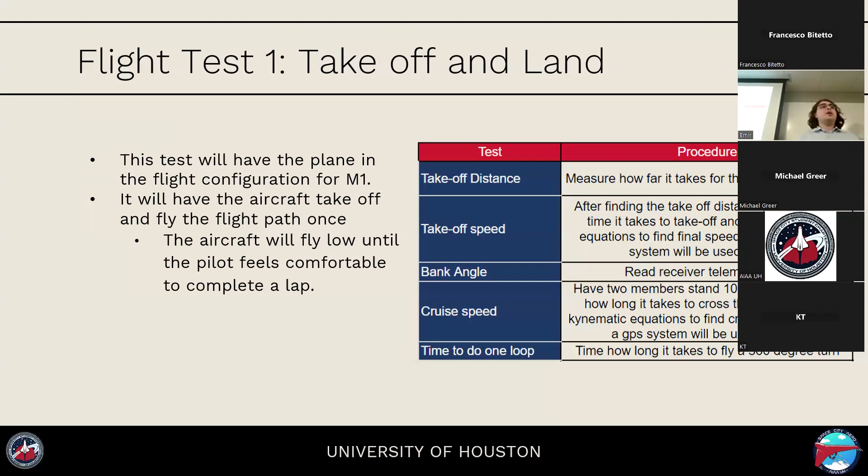For bank angle, our receiver gives us telemetry data of that bank angle, so we are going to ensure that our plane can withstand the estimated angles. Same thing with the cruise speed: we're going to have two members stand at a 100-meter distance from each other and time how long it takes, same way as the takeoff speed measurements, using kinematic equations, but also hope if we're able to get the GPS system we will use the more accurate method. We're also going to be timing how long it takes to do one 360-degree turn.

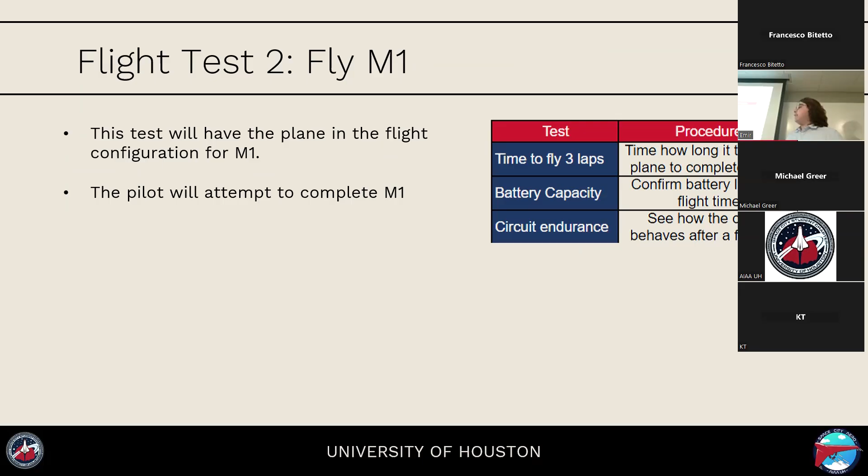Our second flight test, after we confirm confidence in our aircraft, we will be doing the full Mission 1, which is going to have the pilot take off, go to cruising altitude, and do the full 3 laps. This is going to help us confirm how long it's going to take us to do the 3 laps. It's also going to confirm that the battery is sufficient enough for the full flight during flight conditions, and it's also going to show how the circuit behaves after a full flight throughout flight conditions.

Our third test will be for the second mission. We will have the plane loaded up with all the cargo and passengers. The pilot will take off, fly 1 lap. After we find confidence in the plane, ensuring that the maximum takeoff weight requirements are met and it's airworthy to fly, we will then do the full 5-minute flight, attempting as many laps as possible, and confirm how many laps we can do. We also are making sure that the plane can fit and fly with the cargo and passengers we expect.

Our last flight test is going to be the Mission 3 configuration. We will have only the banner system with any weights needed added. The pilot will take off, and after the first turn, we'll deploy the banner. We will do 1 lap, release the banner, and land again. After we validate all systems work nominally, we will then reset the plane and do a full 5-minute flight.

And we're going to ensure that the system won't do an early release and will release properly with full banner deployment, and also make sure that our test flight laps are confirmed.

And with that being said, we are concluding our critical design review. But before that, I would like to thank a couple people.

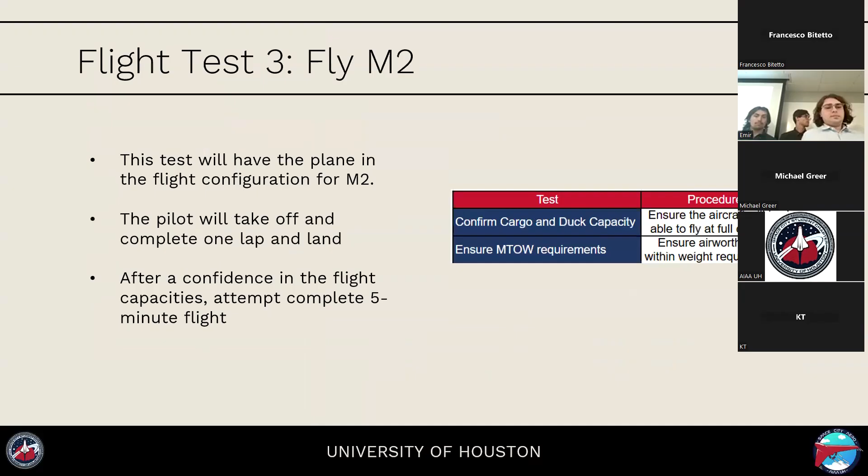So one thing I was curious about in the aerodynamic stuff was how are you verifying the stability data in ANSYS? You said that you got the stability from XFLR5, and you were planning to compare that with ANSYS. What stability stuff are you expecting? So there's certain derivatives, as shown in the slide, on lateral and longitudinal modes that XFLR gives us. The problem with XFLR is that the code it was written in isn't accurate, right? So we have to use another software to verify that and see if XFLR even gives us valid data.

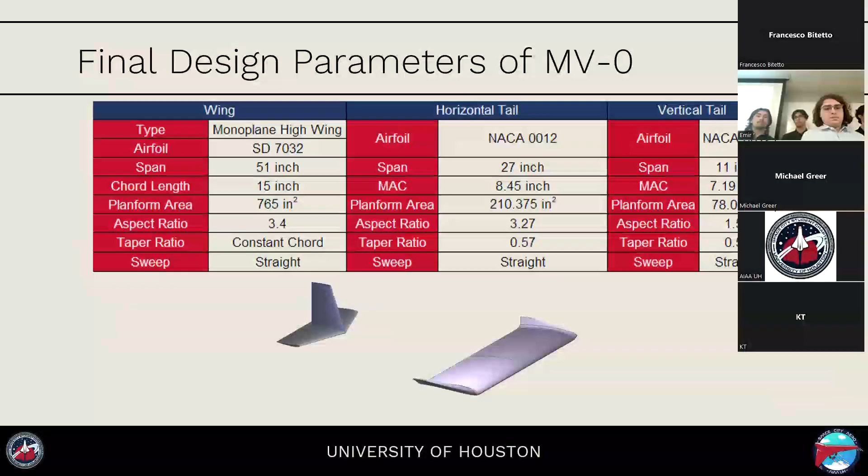Okay, so you just want to do a test to see what lines up and make sure things are lining up so you can kind of do it. And also we're still learning stability analysis. I mean, that's probably what you got, it's worth like three reports.

Where were the equations for empennage sizing derived from? I didn't see any references. Yes, it comes from basically all aerodynamics textbooks, aircraft design textbooks, but we got that one from, I believe, Introduction to Aircraft Design by Raymer.

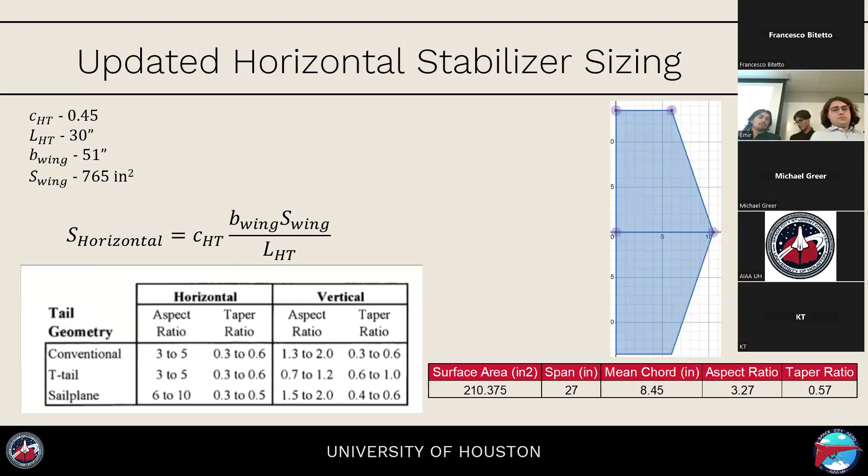I'm glad you guys are using equations and formulas based off research for the sizing of stuff. The LVT and the LHT, that's the distance. Was that something you guys analyzed the effect of changing, or was it given to you as a fixed parameter? It is a fixed parameter, recommended by the textbook. There's a range of values we can take. We looked at other teams, they just use a value somewhere in the middle. But the CVT and CHT are given.

So there's a point where you got to Aero tests. Should the Aero test, I assume the rest is all test flights? Yes, flights, because it was just ground tests before. Obviously, as you guys get more experience and more resources, there's a lot more tests that can be done.

I just put a note about sacrificing lift. Wherever you guys sacrifice lift and need to fly faster, you guys are going to find that out when you fly it, but I'm sure it's on your mind that if you have to fly faster, your battery's going to die faster. It's likely it might die in flight, but you might have to determine your number of laps based on how long your battery lasts. That's how a lot of teams end up doing it. Yeah, batteries die, right.

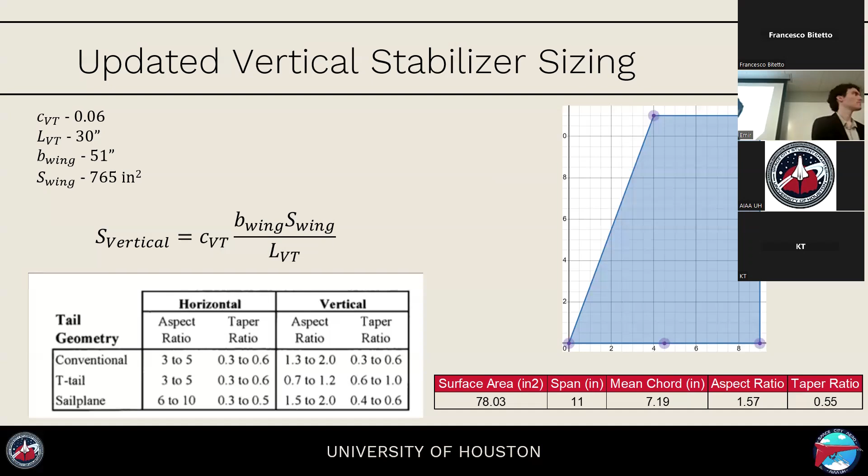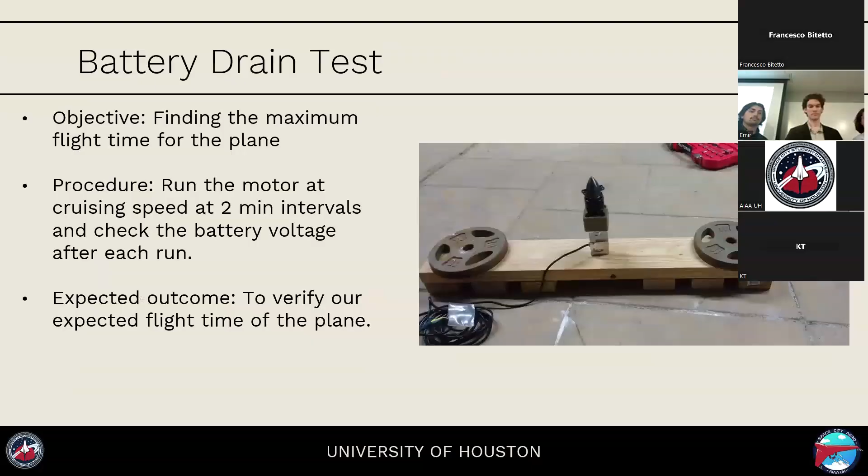So the sizing of the control surfaces - the sizes you saw were based more on the ratios themselves. To optimize them, we need to finish the stability run, which we're still figuring out.

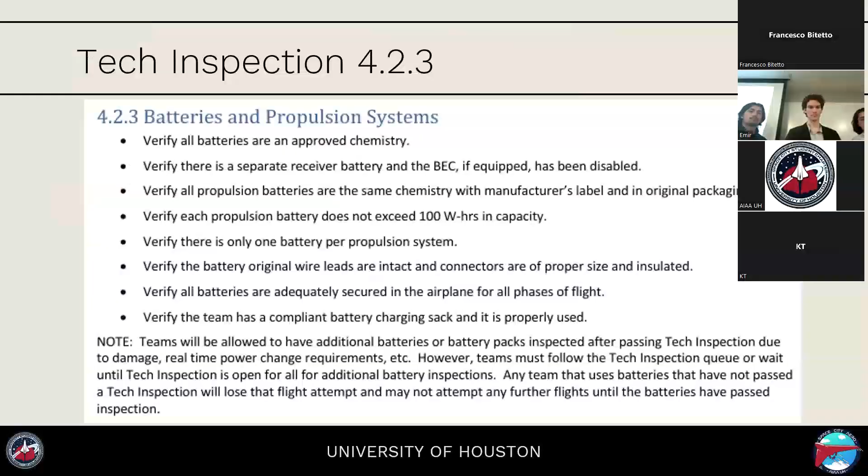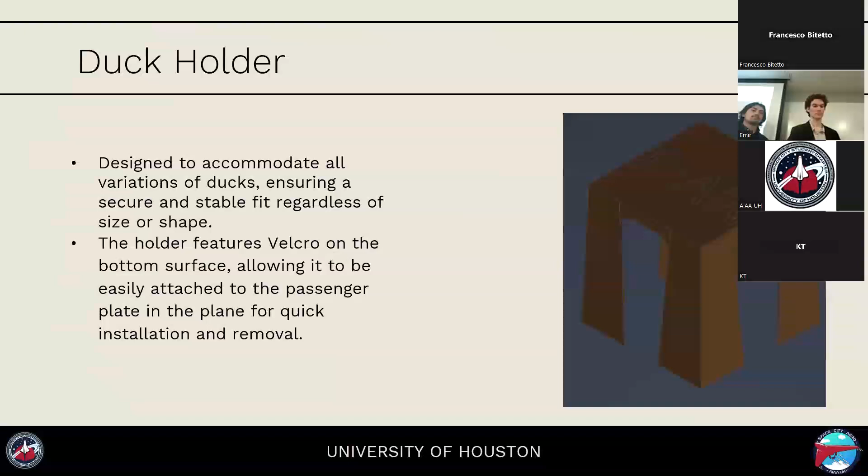So when you apply it, for the horizontal stabilizer and the vertical stabilizer, you'll see when you apply it, try to do a turn and you'll see that you can't turn any farther. You get that, you can see how far you're in. You'll find out, in the end I'm also going to factor in how you connect the servos to the control surfaces, because you can change that - explain, it limits or increases the travel range, or less total, that being the servo, or from the linkage. One more point - you can mess with the geometry to get more or less, push more or less to get that.

Yeah, make sure you don't stall those servos. I put a note way later for avionics stuff, about making sure that these servos aren't draining that small battery.

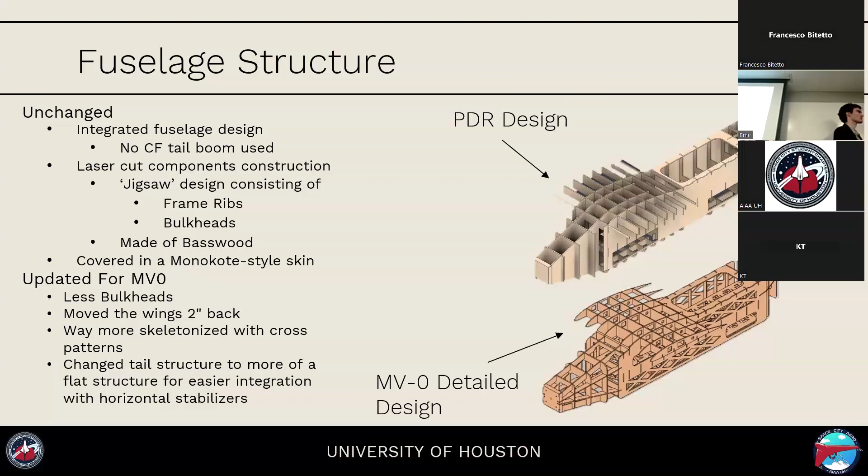Unless that's - yeah, almost, but we're gonna have approval of the mission of the weight difference by mission. But no associated CG, and the weight difference was little, so I'm assuming there's no significant effect. So the weight difference shows CG when you have the 40%, how far is it? So the first mission is further back. When we have all the weight on it, it's actually going forward. So I think we had it where the payload was in there, so it unloaded. I would just make sure that your CL versus CG is somewhere where the plane is still stable for any operating conditions.

Even if, for example, let's say you did your math and it'll work if it's fully loaded - what happens if you get to competition and you determine, oh, we can't fly this fully loaded, you need to fly it with half payload. Is it still going to be okay? Is the CG still acceptable?

They allow ballast at competition. We also have a range for allowable CG. It was, I believe, from 15% of the mean aerodynamic chord, measured from leading edge, to around 30%. That's what we're aiming for, but the best stability is achieved at around 25-20% range.

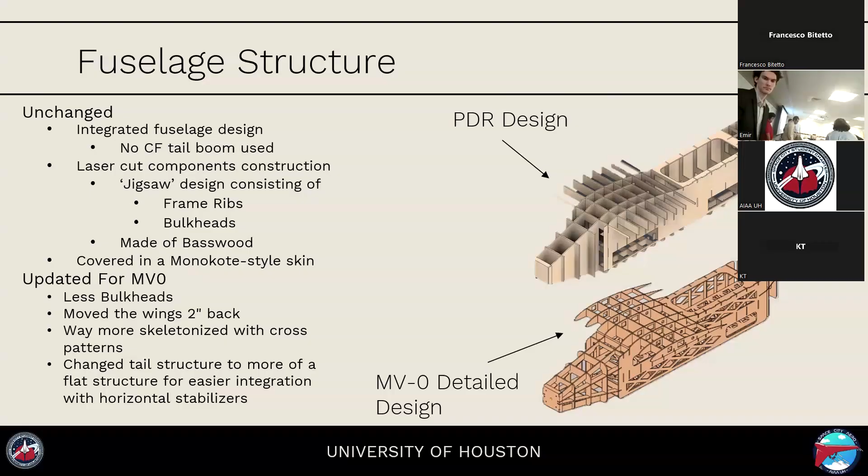The first complete bulkhead is very good, and we also want to test it to see if it'll break or won't break. Yeah, that's what we actually did test - that's right there, that's the partial test. It's like a 10 kilogram load, which is 100 newtons, and it was proof of concept. But we need to test that in terms of a load path within. Yeah, that's what we're gonna do now.

Then messing with the infill, so you can have minor infill where you want it low, pretty consistent and strong. You can use localized modifiers - like how you can add a negative volume, you can add a part, just add a box or a sticker. You can do the modifiers where you can make that 100% infill. So where the screws are going in, that's 100% infill, or has a wall thickness of like 5 walls. That's close, and so that way you can have those walls be single areas that are stronger, and then leave the rest of the space.

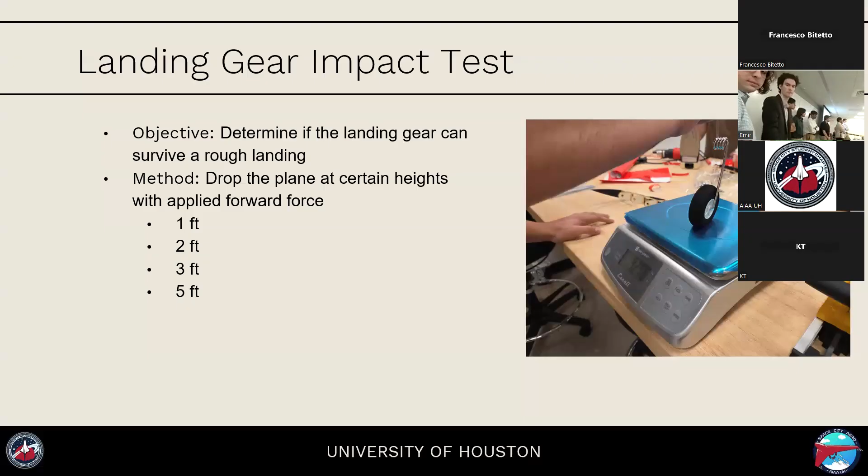At least, either that or intentionally design in a weak link on that banner mount. I assume y'all are assuming if it doesn't release and we're landing with it, let's say it catches on something—makes it back, flies back and does another run. You don't want a weak point possibly somewhere in the bar, so that if it catches on something, it's not now two halves of a plane instead of a full plane. Instead it's just, oh no, we're out of range. Yeah, or if it sticks in the ground and torques the plane exactly inside a weird end—exactly.

Just something to consider. Yeah, and with testing that, it's a bit of a risky test, especially due to our time constraint.